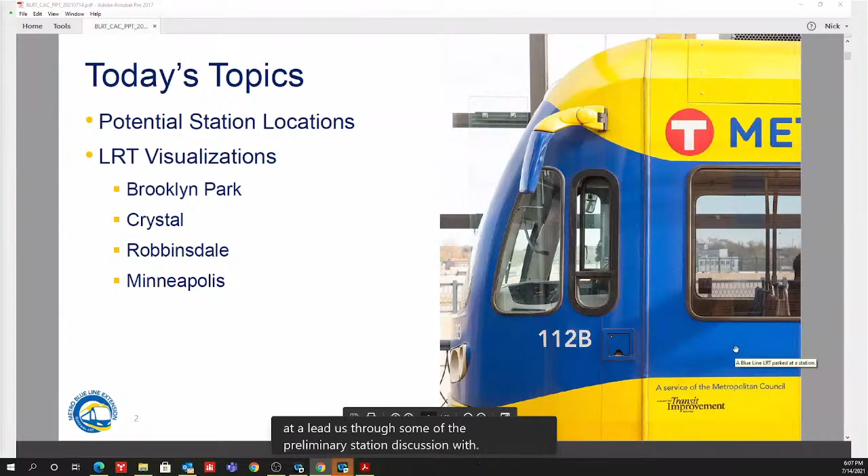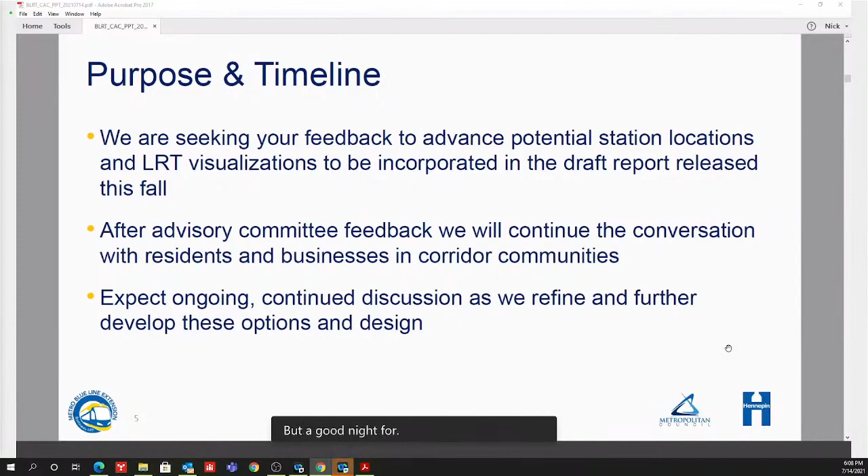Okay, we'll turn it over to Dan Soler to lead us through some of the preliminary station discussion. Well, thanks everybody, and happy to see folks tonight on a rainy Wednesday. Rainy here anyway, maybe stopping, but good night for a CAC meeting. So we presented similar information on stations and visualizations that you're going to see tonight at the Business Advisory Committee yesterday, and we'll share similar information with the CMC.

And this information on stations and possibilities for LRT is all work that we want to engage with in our open houses and public meetings through the remainder of the month of July. So what are we doing? We're looking for feedback so that we can continue to advance where stations might go, how they're configured, some feedback on the visualizations that we have, side running, center running, different configurations of LRT.

After these advisory committees, we're going to bring this out into the community at a number of public meetings. May see some of you folks there. Some are virtual, some are in person. We've got meetings in every city, and we want ongoing discussion for the next several months as we continue to look at what works, what makes sense, and how we continue to advance slowly and refine these design options.

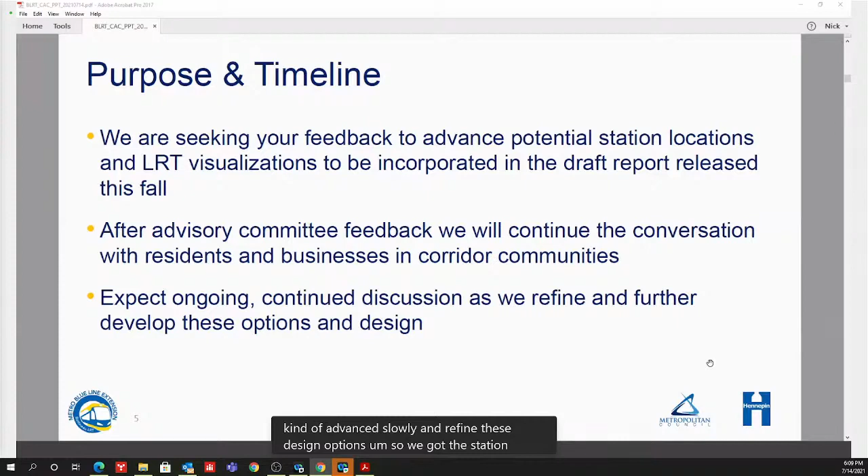So with regard to stations specifically, we're going to present tonight some potential station study areas that we have identified through our first cut of where we think we should study the possibility of stations on the various route options.

So how did we come up with these locations? Well, previously planned stations where we're close to or on the existing alignment were taken into account. A lot of work had been done around those areas. We had interactive maps and surveys, as you guys are all aware of, that people put a lot of input into about where they thought station locations would go. That fed into a lot of this work.

We looked at where key destinations were along the various routes. We looked at where transit connections would be, primarily with arterial BRT, but local bus lines as well. We looked at spacings, not getting stations too close, not getting stations too far apart, finding somewhere in that half to one mile spacing along here.

We looked at kind of a balance of the overall number of stations. So the total really hasn't been determined. There's no magic number we can have the same as we had on the last alignment, or we can have less, or we can have more. There's no real magic to it, other than, have we served all of the areas that we need to, and have we kept it a functioning LRT route that maximizes ridership, minimizes travel time, picks up and serves residents and businesses, but at the same time doesn't stop every block.

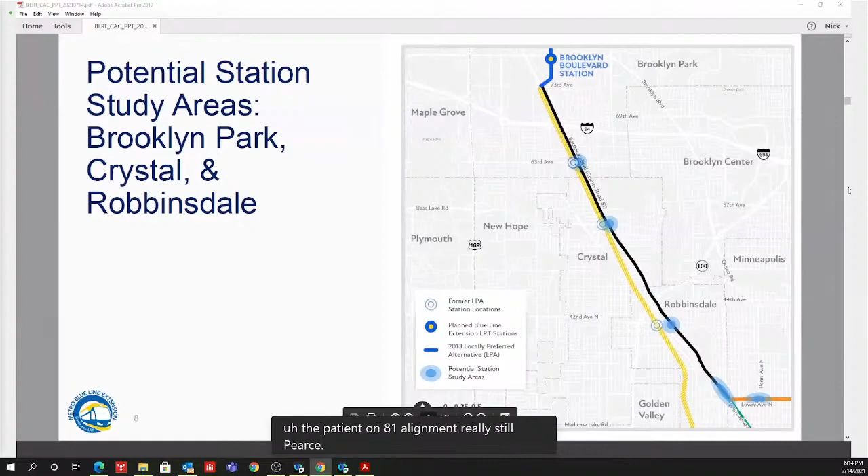Again, a lot of station area planning work about redevelopment opportunities has been done there. Really, the work done for a station on the railroad alignment and the station on the 81 alignment still pertains in those spots. Down in Crystal, very similarly with the station.

Dan, can I ask a question quick on that?

I know it's not designed yet, but I'm curious because it went from being between the rails and the parking structure, and now it's going to be on the other side of the rails. Is that going to go up and over where the BNSF is, or how does that work?

Good question, Jason. As you may remember, even on the railroad alignment it was on the east side of the BNSF tracks. So we proposed a skyway coming out of the second level of the parking deck, going over BNSF and down to the station, with the south end of the station served at grade with the traffic signal at 63rd.

On a preliminary basis, we'd propose to do the same thing. If it was in the center of 81, we'd serve the south end with the traffic signal, and we'd have a skyway, this time just longer. It would go over the BNSF tracks and over southbound 81, then connect to the station there.

What we don't know is whether we'd carry that design to the other side of 81, or whether to get to the east side of 81 you'd have to go to the south end of the station and cross at grade. We haven't really looked at that yet. There would likely be a vertical connection, since we still have to get over the railroad tracks—we can't cross those at grade. That would typically be the design there.

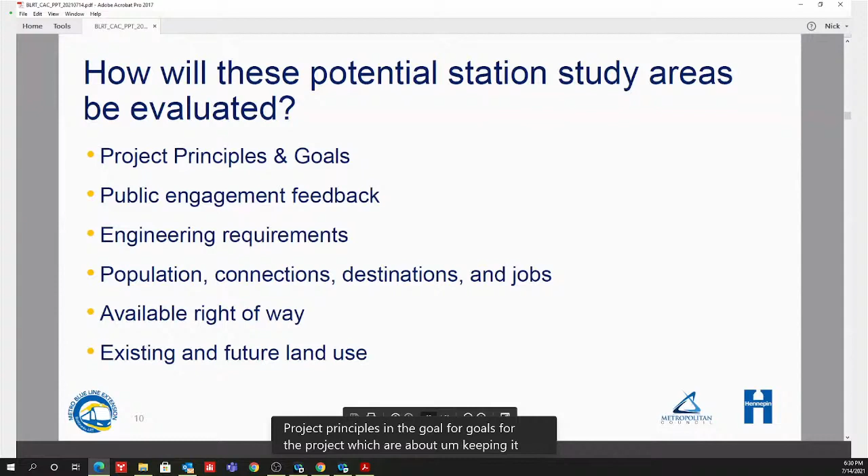So that's a little bit about how they'll be evaluated. So for discussion, both from folks tonight if they've got any, as well as ongoing, these are the things we're looking for info on. Are we missing any key destinations on these routes? Does it seem like it's in the right spot? Are we serving what's there today? And are we providing stations that allow for what might happen in the future?

Are some of these more important than others? What do we need to know? What community assets are most critical that we need to both serve potentially with a station, and then avoid significant impacts to because of a station? So that's a little bit of the discussion that we'll want to have at our public meetings over the next month to get feedback on these.

So that's a real high level presentation on where we're going. This is a very key part. It's also one of the funner parts, right? Because working on an LRT project is about where are we going to be able to stop and where are we going to be able to serve customers, and it starts to look like it's coming together when we do this. So happy to take any questions, any comments, any feedback from anybody.

Kathy has her hand up to begin with. Dan, Kathy Frazier. Hi, Kathy. Good evening. Hey, good evening.

I have a few questions here. The first one, I thought you mentioned that we are no longer going to have a park and ride on 73rd. Is that correct, in Brooklyn Park?

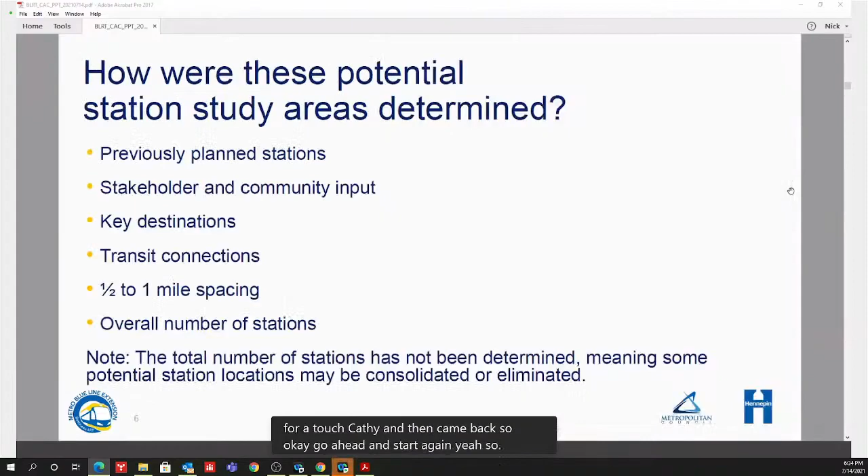Yeah, so currently it looks like there's no station on 73rd. So Brooklyn Boulevard will serve the 73rd Avenue businesses and people that live over there. And the distance from 73rd to Brooklyn Boulevard appears to be a little over a mile. So I'm just wondering what was considered there in terms of reaching some of those communities and businesses on the 73rd area.

Now you're challenging me to think about the past. I mean, I know we had always proposed a Brooklyn Boulevard station because of its connection to the retail there and the Starlite Transit Center and other spots. And then, of course, the next station is south at 63rd. So I don't know if we'd considered a station in the middle. I just don't necessarily remember that. It also seems like 73rd to Brooklyn Boulevard is not a mile, but I could very well be wrong.

Well, it depends on where in Brooklyn Boulevard that is. That's true. We do know that it was intended, Kathy, that the Brooklyn Boulevard station would serve that kind of entire residential area between West Broadway, Zane, Brooklyn Boulevard, and the south. And then, yes, in some cases, it is a little farther walk than maybe ideal. That's something to think about in the future, and there's also another issue in that area.

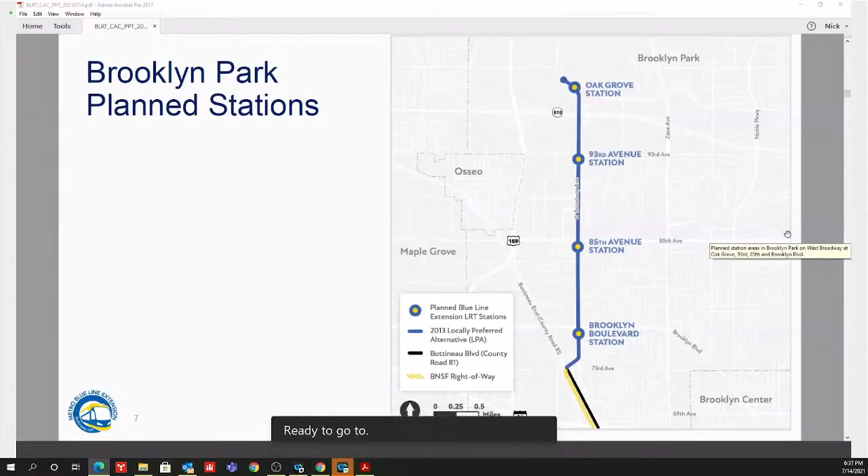Are we ready to go to Catherine? It's just a quick one, Dan. I've been looking for a traffic study, other than ridership. Is there a traffic study for the amount of traffic on both West Broadway and Lowry when we're talking automobile, and the potential impact of turning from Washington?

Okay, so yes, we've pulled together a traffic study that looks at volumes along West Broadway and Lowry, and what the conditions are today, and what the conditions would be if we built LRT. Right, Nick? This is all true, correct? Yeah, that's true, we've pulled the existing studies, yes.

Tell me, what was the last part, Catherine? Was it about the turn, is that what you were saying? Yeah, I mean, of course, you're looking at a turn either from Washington to West Broadway, or Washington to Lowry. So is there a study from other projects that talk about that interaction between a turning train and traffic? So in both of those scenarios, Catherine, we could never make the turn from Washington to Lowry or Washington to West Broadway at the intersection with traffic.

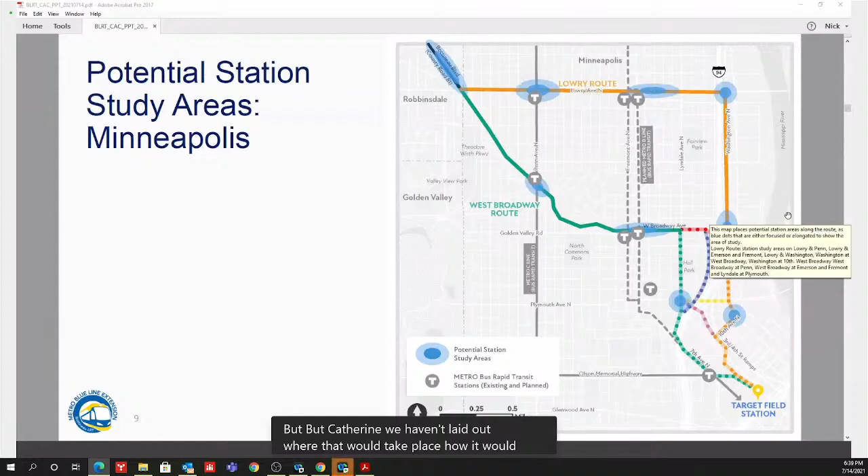That's similar to what would have happened at Van Wyck. So what we haven't done, though, Catherine, is laid out exactly where that would take place, how it would affect traffic, where we would make that movement. I mean, that would all be much more fine-tuned engineering design work. Yeah, thanks.

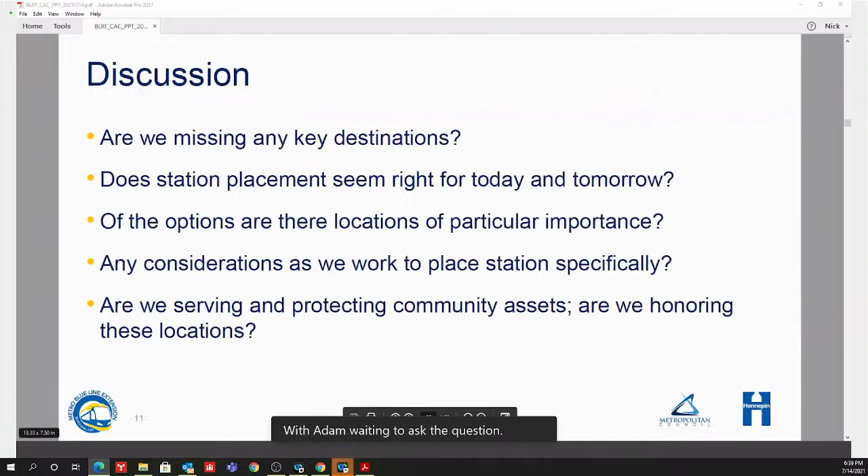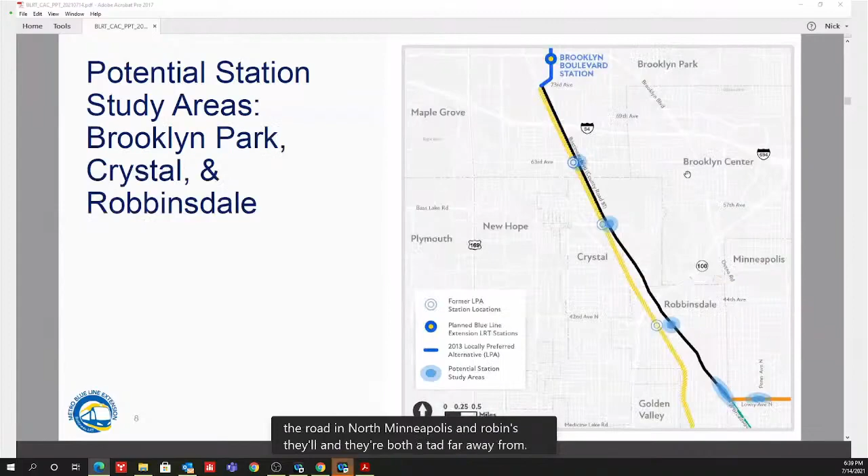With Adam waiting to ask a question. Thank you, thanks Dan for everything. Question I have is looking at the route, there's two main grocery stores that I see on the route in North Minneapolis and Robbinsdale, and they're both a tad far away from the proposed stops. Has there been any consideration about moving one of them a little closer to either the Cub on Lyndale or the Hy-Vee up by North Memorial?

Good question. So certainly with Robbinsdale, let's start with Robbinsdale. I mean, part of it has been, do we go a little further north with the North Memorial Station, so we would serve the hospital to the south and Hy-Vee and North Memorial's ambulatory clinics, or would we stay closer to the hospital? That's a consideration, that's a discussion, that's a balancing point there to get closer.

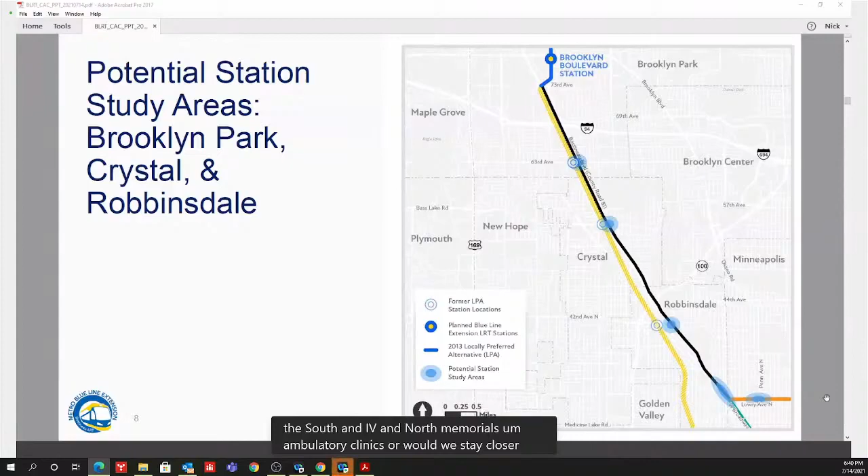Brent talked a little bit about his work. We also got a comment from the park board that they're putting a lot of improvements into North Commons Park. So should we be leaning more towards Emerson with that station, to be a little closer to North Commons Park? But that's part of it—we can't serve everything. So where do we use signage, pedestrian facilities, and where do we put the stations to get the maximum benefit out of it? The grocery stores are great examples, Adam, of key destinations.

I certainly have seen so many people on University Avenue from the Walmart, from the Cub that's there on University Avenue, using the train east and west. So grocery shopping is a big piece of it. Those are both key destinations in those cities.

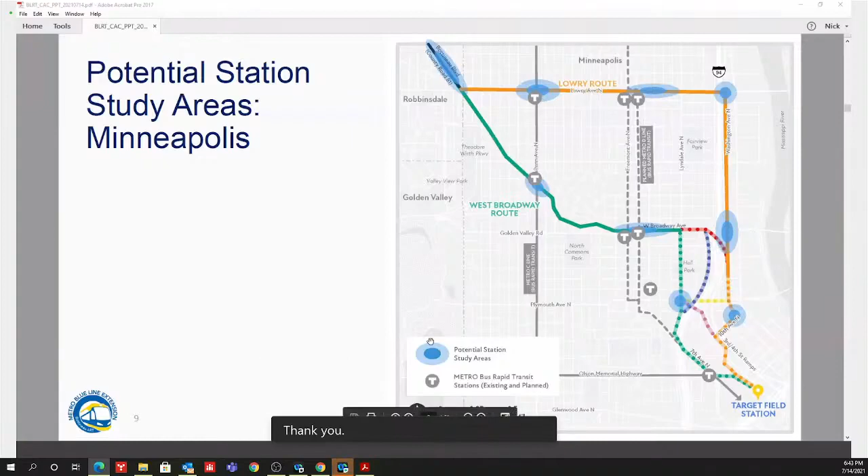I think we'll go ahead and move on. Oh, go ahead. Yeah, sorry, that was me, I'm looking for my hand raising and everything—it's just not working for me. Okay, this one works too, so that's good. I'm just going to blurt it out on this one.

Just a refresher—what is our proposed runtime from Target North, or that area, all the way down to Target Field? What are we projecting right now?

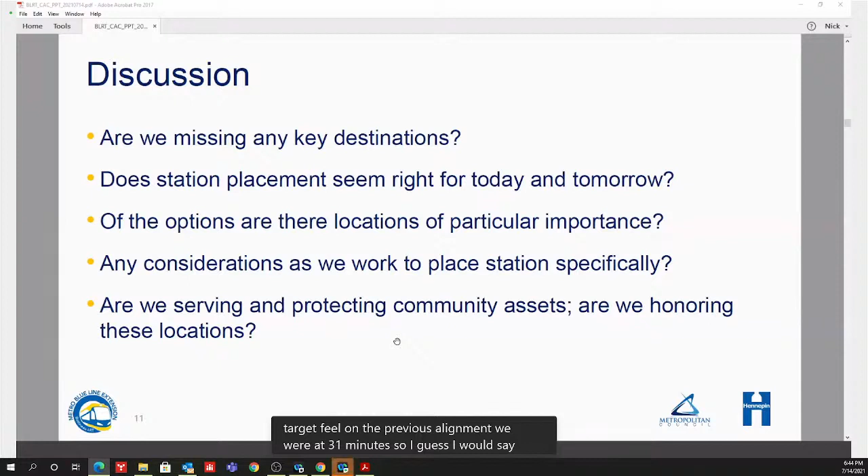I don't know what we're projecting per se as much as what we were at. We were at 31 minutes, right, Sophia? Yes, we're at 31 minutes from Target Field, Target North Campus, Oak Grove Parkway Station to Target Field on the previous alignment. So at a 31-minute runtime with the stations we had on the previous alignment, we were projecting ridership of about 26,500, 27,000 riders a day.

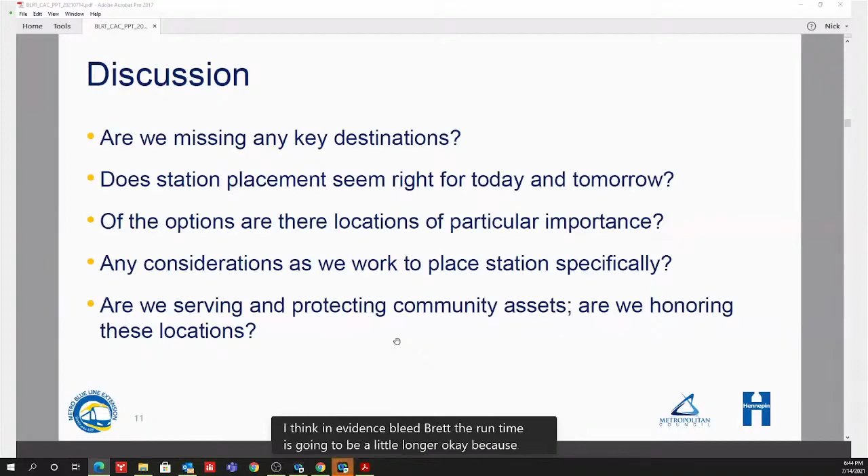So I think inevitably the run time's going to be a little longer than it was before, because we're in so much street running now that it's simply going to be. But we're also probably adding some stations and replacing some stations that I'd guess are going to have higher ridership than some on the previous alignment. So hopefully we find a balance, and maybe we're at a mid-30s, upper-30s run time, but we're still getting 28,000 riders a day. That would be great—we don't know that yet, but that's what we'd like to shoot for.

Got it. Follow-up question: the frequency on the trains themselves, every 10 minutes—are we looking at that as well? That's what the current Blue Line is, and we would propose right now to stay on the current Blue Line schedule of 10-minute headways for most of the day.

Excellent, thank you. I got my hand up. Yes, Catherine.

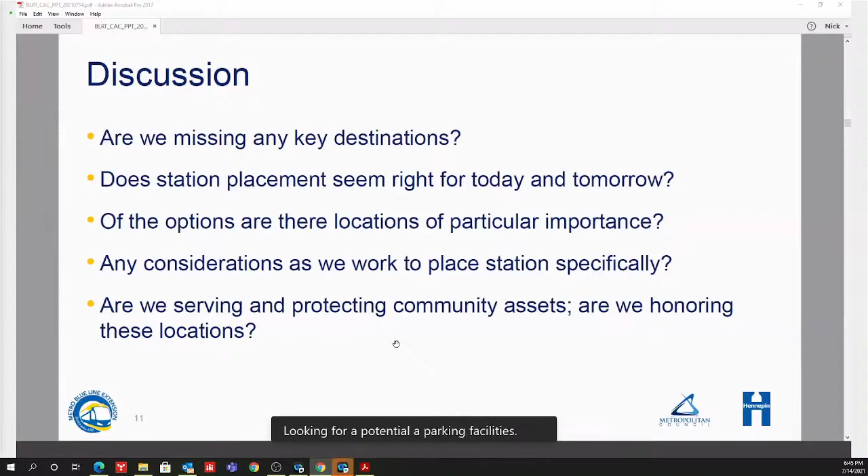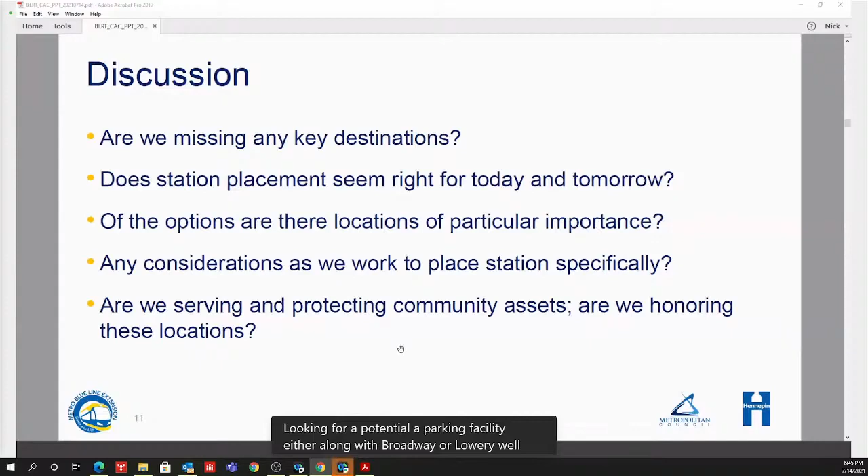I know there's been some discussion about looking for potential parking facility, either along West Broadway or Lowry. Will that selection have an impact on the station locations, or have you found potential areas where you might either build or utilize as a parking structure for the businesses along either one of those corridors?

We have not. That doesn't mean we haven't looked and said, oh, interesting—that one segment of the Cub parking lot near Lyndale, as I've looked at an aerial photo, never has any cars in it. There are some possibilities, but as it relates to station placement, that hasn't been as big a concern.

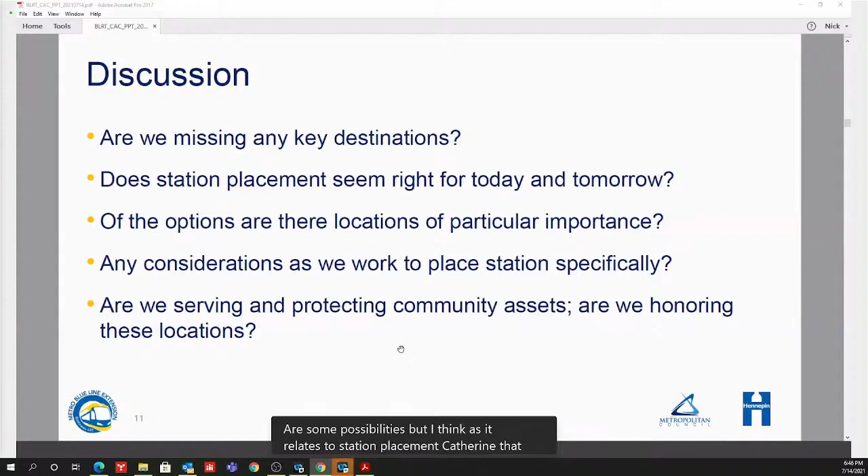I want to be very clear here: we're not talking about building park and ride. Any parking we build is for the use of businesses along the corridor because of the reduction in on-street parking availability. We do not want people to come as far as North Minneapolis and park in a park and ride intended for businesses to take the train to the airport. That's not the purpose of it.

We need to be diligent to get parking where it's needed for the businesses, and stations where it's needed for the riders—that's different from what I talked about with Robbinsdale. There, as we look at where we might put a station, where we might put park and ride spaces is different. We're trying to provide some park and ride spaces because we don't want people parking on street in business parking, and kind of vice versa in North.

We want to provide parking for businesses, with people walking up, or biking and busing too, and using the train. I'm totally with you on that—I'm not married to this cars-everywhere scenario. Yeah, so that's the intention.

So we've looked at some spots, but we need to work with the community about where it makes sense to put some parking and how it will best serve business. Just because we have available space way up north on West Broadway does no good for the businesses down by Emerson—it can't be a mile away. It's got to be close to where it's needed.

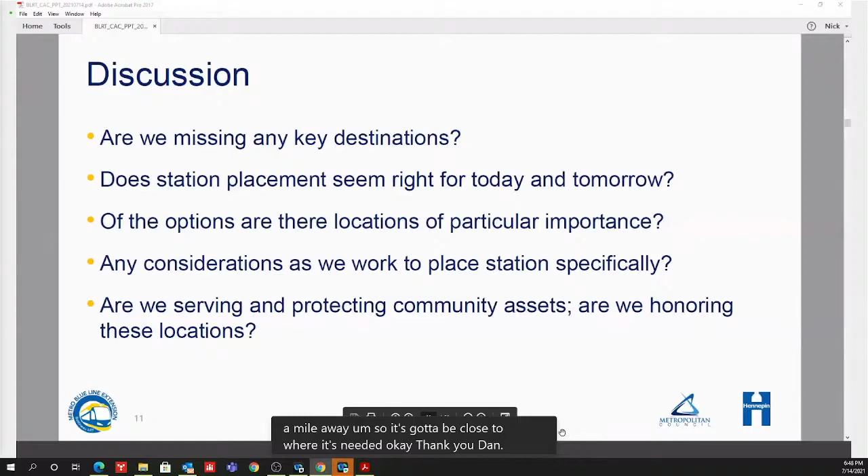So, I'll turn it over to Nick and we can talk about the visualizations—a lot of exciting stuff to see there as well.

Yeah, thanks everybody, good evening. As we roll these out, some of you may have seen a few of these visualizations. We're going to show representative ones at key spots along the corridor, just to get an idea of the context as we go through, starting up at Brooklyn Park and down through Crystal, Robbinsdale, and into Minneapolis.

So these visualizations are to start that conversation. A lot of folks are asking how this fits and how it works, so we're rolling these out here. You'll notice there's not a lot of dimensions on them right now.

We know we have a certain amount of space, but as we go out to the public and get feedback, and work with the city and county on these, we'll start appropriating the space that's out there for roadway, for sidewalk areas, and whatnot.

Also, on a lot of these visualizations you'll notice we're not showing a lot of landscaping and everything at this time. It's really to let everybody get an idea of the context, what the massing is within the available right of way that we're working with.

We're not showing intersections at this time—we've got to work with our project partners, the city and the county, on how intersections are going to operate, how we get left turns in, where we put bus stations in these areas. This is a lot of work we still have to do, but this is the initial rollout, so folks can get in their head how this actually works. So I'm going to start out on the north side here.

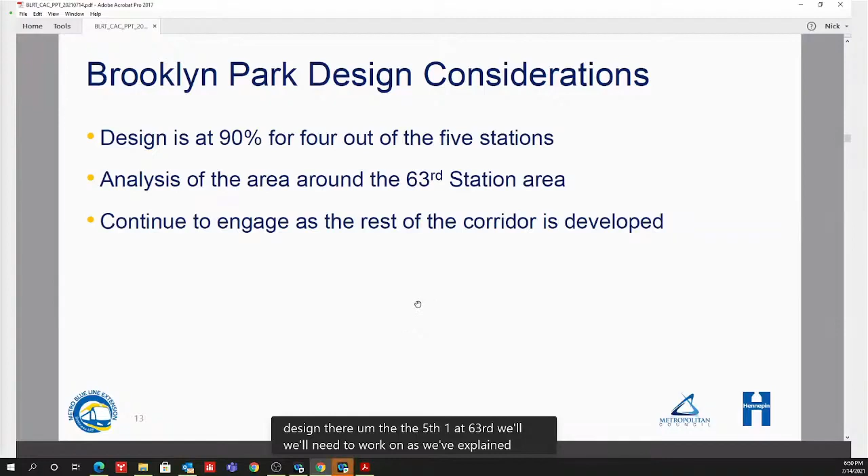Brooklyn Park is the easy one, as covered in the last portion of the presentation. We were at 90% there, with 90% design on 4 out of the 5 stations. The 4 stations on West Broadway are in design. The 5th one at 63rd we'll need to work on, as we've explained. We're going to analyze that area and continue to engage with the rest of the corridor as we develop it. We want to continue engaging with the community in Brooklyn Park, because it's been a year and a half to 2 years since our last meetings with folks there to explain where we're at with the project. It might not be fresh with them, or they may have forgotten, or maybe they just haven't known about it and are newly engaging.

The exhibit I have here comes from our 90% plans for the 85th Avenue Station area. As we get farther into design, we start knowing how the station platform will fit. In this case, we're center running down West Broadway. We start knowing how to incorporate pedestrian and bike facilities on either side, and we look at road design, refining intersection design, focusing on safety and pedestrian crossings, and how we connect to the surrounding areas.

In this example we have a center station. We have access to it - this is fairly typical for a center station at an intersection. We use the intersection as access on one side, and on the other side we'll always have two means of access to a station. On the back side, there's a pedestrian access that goes to and through the station across the road. At the crossing, there will be signals where pedestrians can push a button to activate flashing stop signs for cars, which stop to let pedestrians across.

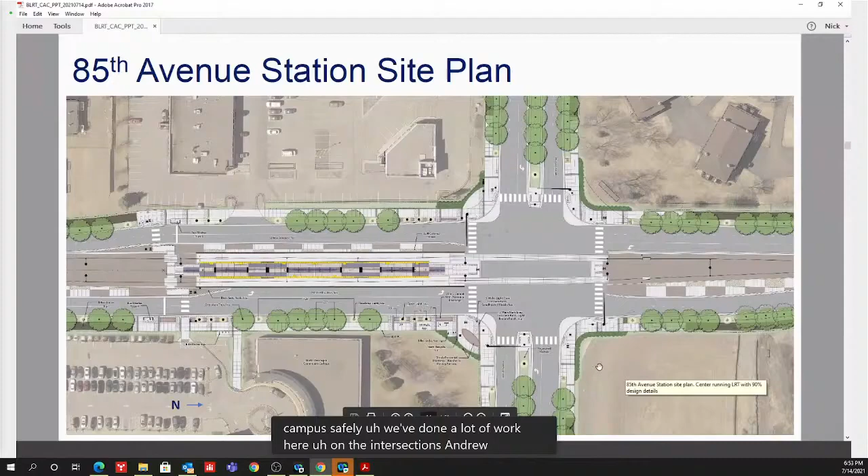We have really good renderings of how the center stations would work. In the previous design, all our station platforms had the same footprint - they were all center running stations - which is convenient for riders, since they know there will be card readers as they get on, so they can tap their Go-To cards, or ticket vending machines up front to buy tickets. These are all in the same spots, as well as the signage letting folks know which track they're at. We'll also have video signs to announce train times and which side of the platform to be on depending on direction. As we worked on this project on West Broadway, we narrowed down the traffic lanes so everything could work within that right of way, which helped provide a safer pedestrian experience by narrowing the conflict area with vehicles and reducing the time a pedestrian has to be out there.

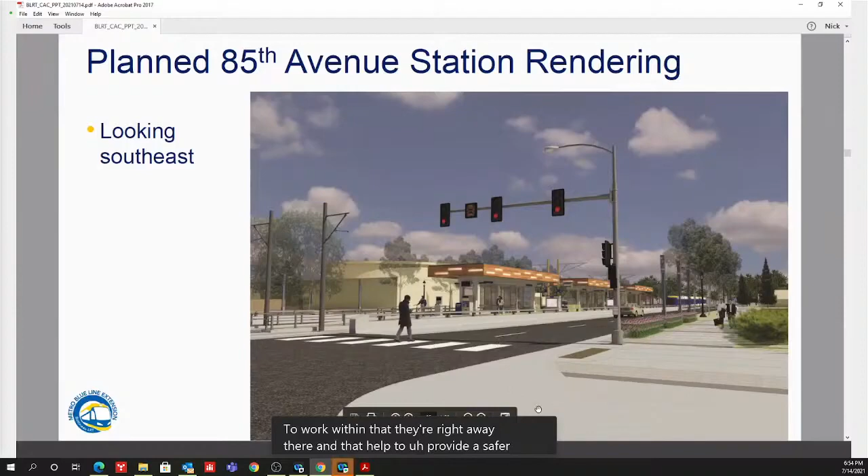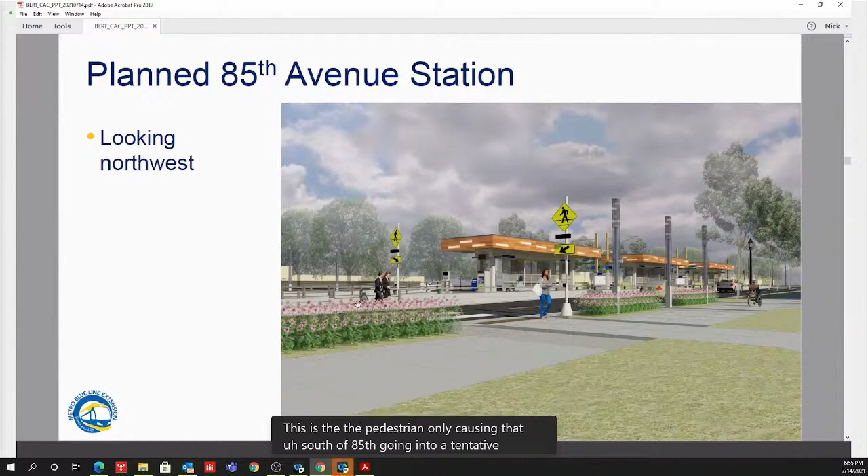Same station, just looking at a different angle. This is at the south end, where there's a pedestrian-only crossing south of 85th going into North Hennepin Community College. It works with pedestrian push buttons that bring up a sign with flashers to let vehicles know that pedestrians are crossing.

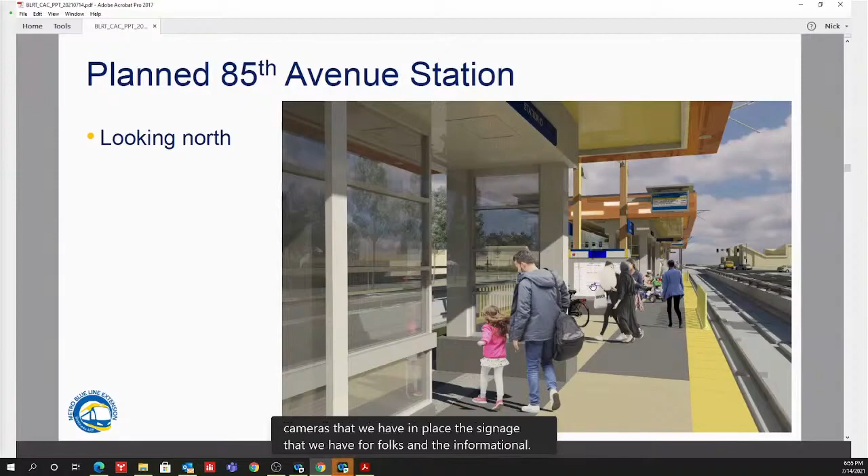And this is a good view of what the station platform will look like, with the shelter, little shelter areas, heaters, lighting, cameras that we have in place, the signage that we have for folks, and the informational signs on train schedules and whatnot.

So that was Brooklyn Park. Again, it's just a recap of work that we've done, and the 90% plans we're at. So as we go down into Crystal, are there any questions on Brooklyn Park before I go forward?

Okay, with that, I'll jump down into Crystal. As we go into the Crystal design considerations, we need to confirm that center running at grade on County Road 81 works, working with our project partners and the community on how it lays out and where the stations go in.

Also, in this area, County Road 81 is a 6-lane design with the center running light rail going down it. We know that we'll have to take a lane from there, so it'll become a 4-lane road design. So we're evaluating, looking at traffic studies, traffic and capacity analysis, and how the intersections will operate through there, and that they still function at acceptable levels.

And as we looked at with Bass Lake Road, we'll look at that design and development and how a station fits in there, moving it out from where it was in the rail corridor, out into 81 in this location.

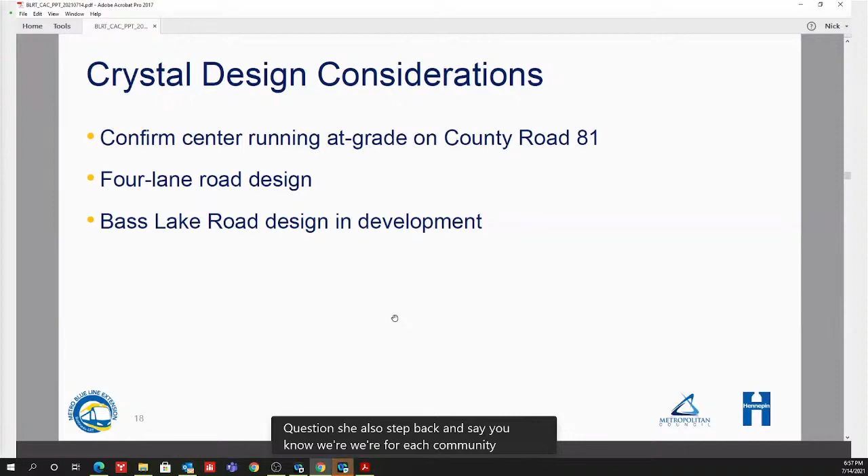I should also step back and say, for each community we're putting together quite a few visualizations you're going to see here on representative areas along the corridor. I'm just showing you a few of them in each community right now, for interest of time, because each community will have a pretty good library of them, and representative spots along the alignment and routes.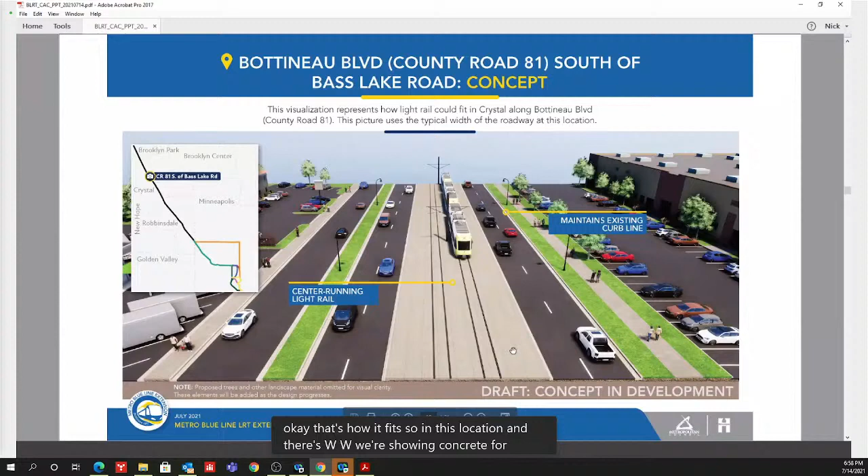And now as I flip down, this is how the center running light rail fits within that corridor. So this gives folks a better visualization of how it fits. In this location, we're showing concrete for that guideway, but as we have left turns, there's a good amount of pavement out here to account for left turns at the intersections. How we program that area outside of what we need for the guideway is still to be determined - we'll look at that as we get farther in design, but this is really for massing again.

What you can see, and I'm going to flip back and forth here, is that with this design, by running down the center using 2 lanes, one on each side, we're able to stick within or maintain that existing outside curb line. So we're staying within the footprint of County Road 81. I'll flip back and forth so you can see how that curb line stays in place, and doesn't really impact, in this view, some of the properties on the outside staying within the right of way.

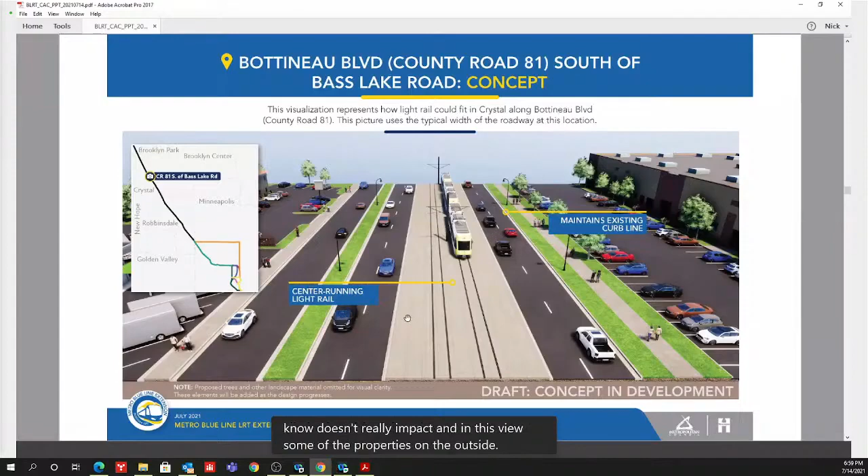I'm going to jump down here a little bit farther south on County Road 81 in Crystal. This is at 48th Avenue. Again, 6-lane roadway through here, center median in this location. This is a little bit more residential in character with residential on both sides of the area, and there's a frontage road here on the east side.

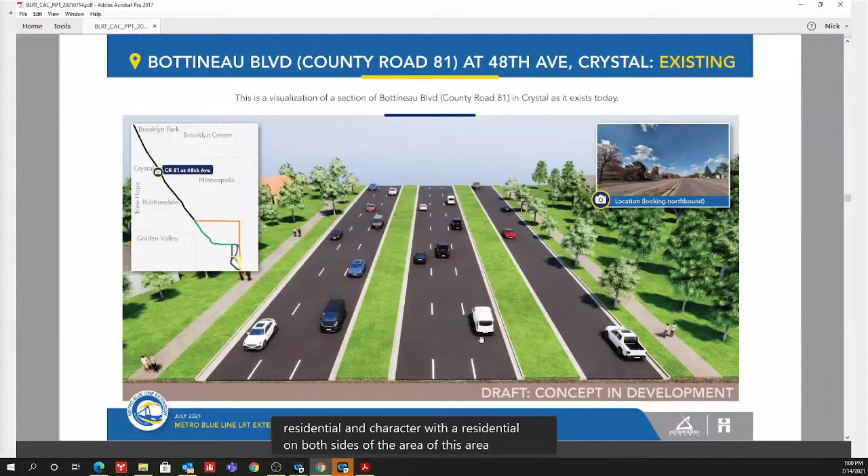And as I go down, this is how the center running would fit in that corridor, with 2 lanes in each direction, and maintaining those frontage roads and maintaining pedestrian access ways, pedestrian trails and bike trails on both sides.

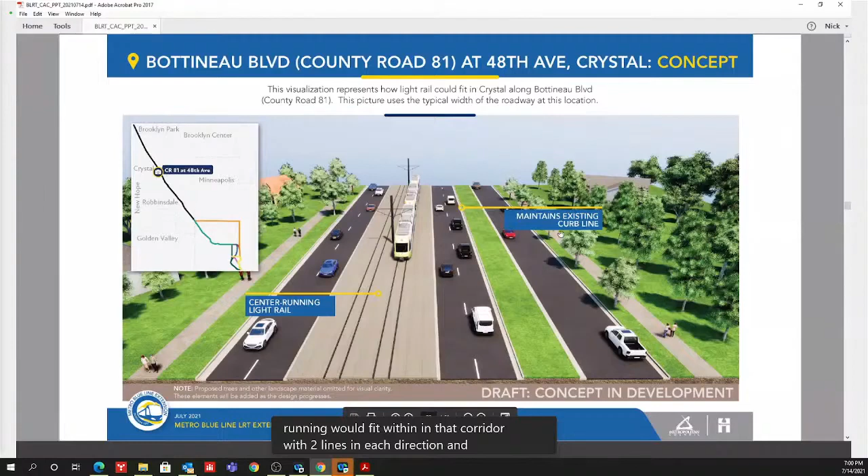Any questions on Crystal as we go through?

Next we're going down to Robbinsdale and some of the same considerations. We're going to confirm center running at grade on County Road 81 in Robbinsdale.

In Robbinsdale, there's quite a few intersections, since we're going to be in the downtown area, that we're looking to maintain, and we believe we can maintain those intersections and the full movements on those intersections.

We want to really focus on pedestrian safety, the crossings, and the pedestrian environment, as we're getting feedback from our advisory committees and from the community. That's one of the key focuses here: we really need to focus on pedestrian safety in downtown, with the highway there, and then you're going to put a train there. We want to make sure that it's safe and accessible and doesn't divide the community.

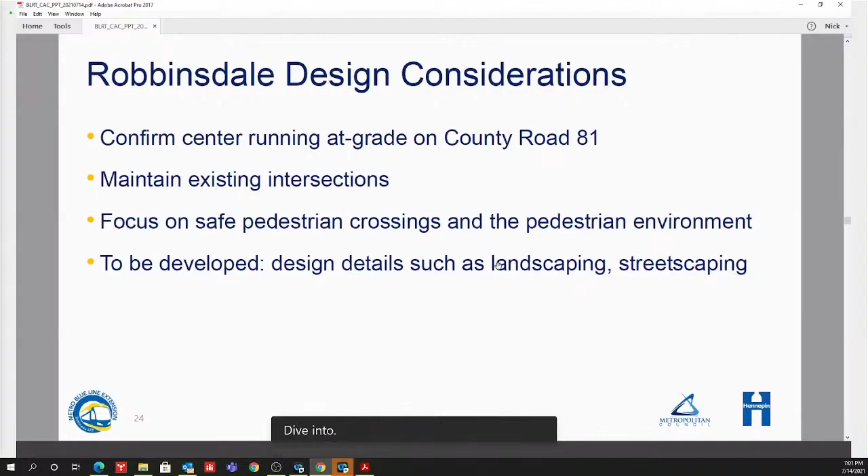What we're going to work on as we put this together is develop those opportunities to create safe crossings and do the best we can to help pull things together and have it not be a divider. So again, to be developed as we move through will be the details, such as the landscaping out there right now - how do we replace that landscaping, how do we work with the streetscaping as we get going forward. Those are things we'll really dive into as we get into design. But again, this is for the massing.

This is County Road 81. We're looking north, just above 40th Avenue. So 41st is up here in the distance, and this is town center up here.

You'll see that we have a pretty good sized retaining wall existing today with parking above it, and there's actually underground parking behind this wall in locations. We have a sidewalk or trails on both sides, a median in here. We have turn lanes that are left turning onto 41st, and also right turns into the Robbins Center Shopping Center, both the lower and upper centers. So this is what it looks like today.

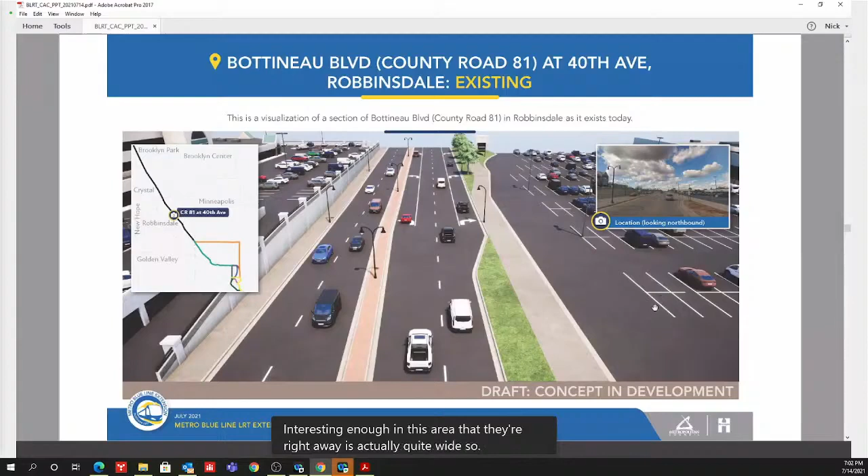You can see with the center running here that it does expand out. Now interesting enough, in this area the right of way is actually quite wide. Go back to the existing - the actual road right of way, or the public right of way, goes up almost to the striping on these parking stalls in this location. So as we're looking at it, we're able to maintain pedestrian access out here, and we'll continue to work on how we provide the best environment we can on both sides.

This is probably a little bit easier to see - we've got some extra pavement out here with these turn lane shadows, as we call them, and those are opportunities we can take a look at in the design as we get farther into it. Is that a place we can do hardscaping with different pavers or different kinds of finishes, or if the city is interested in maintaining, is this where landscaping goes into these locations?

We do know that with the grades, and depending on where stations go, we would likely have to reconstruct the wall that's along here, but it stays within its existing place. We maintain the 2 lanes of traffic in each direction, we maintain the turning movements through here. We do move a little farther towards these businesses. We stay within the right of way with the improvements, but some parking is lost in here, and we'll work with these property owners on mitigation for those losses and how to either incorporate something or work with them on the best solution.

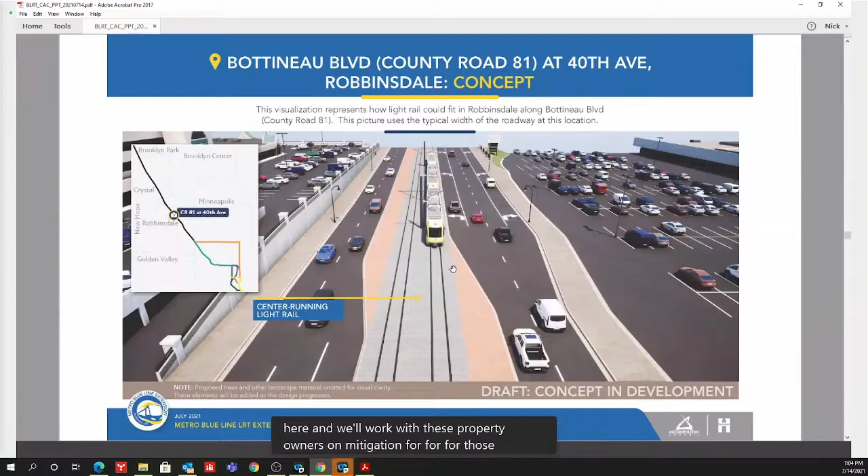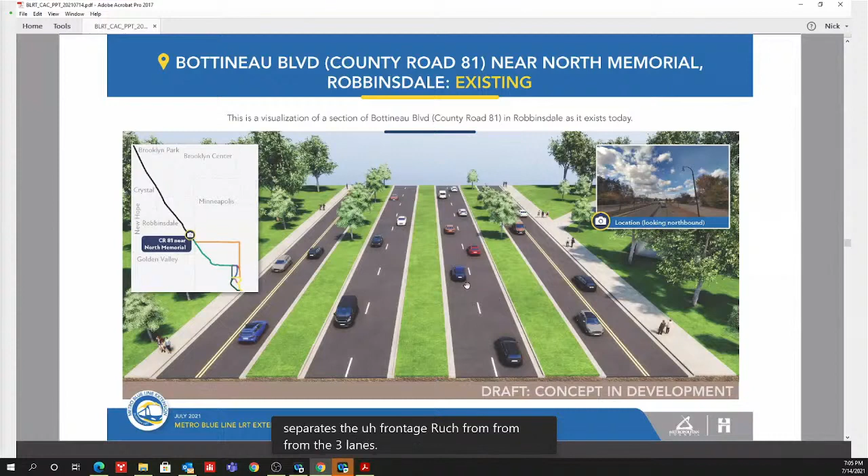As we flip forward here again, we stay pretty close to those existing curb lines, using up that center median, maybe taking a little bit of the boulevards on either side, but we're able to maintain in this location the frontage roads on both sides, and maintain pedestrian ways through this area.

So that's Robbinsdale in this area. Any questions here, concerns, comments?

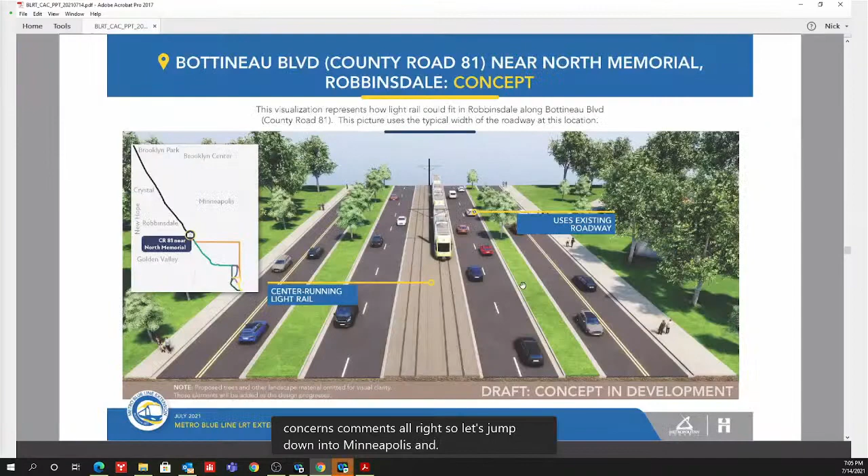All right, so let's jump down into Minneapolis, and this did this to me before. Sophia, you might need to take over here because it's stalled out on me, it looks like. I'm going to stop sharing. Hey Nick, I will see what slide you were on. Slide Robbinsdale, slide 33. Apologize for it, for some reason it seems to time out on me when we get to slide 33. Solid plan, Nick.

It's a good time for discussion on these visualizations, I guess. Are folks seeing these as helpful? Can you see how things lay out? I know there's been a lot of concerns of folks saying I just don't see how it can fit, and hopefully this helps to visualize that a little bit better.

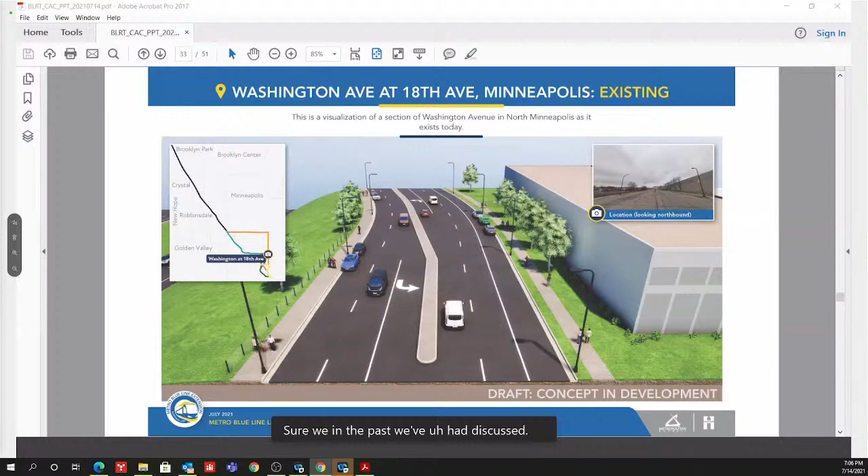Well Nick, while we're waiting, can I ask you some generic questions? In the past we've had discussions about silent trains and some of the issues that were on University. You mentioned that you were going to take special safety precautions in Robbinsdale because the folks would be so close to the train. The train has no whistle, is that still correct?

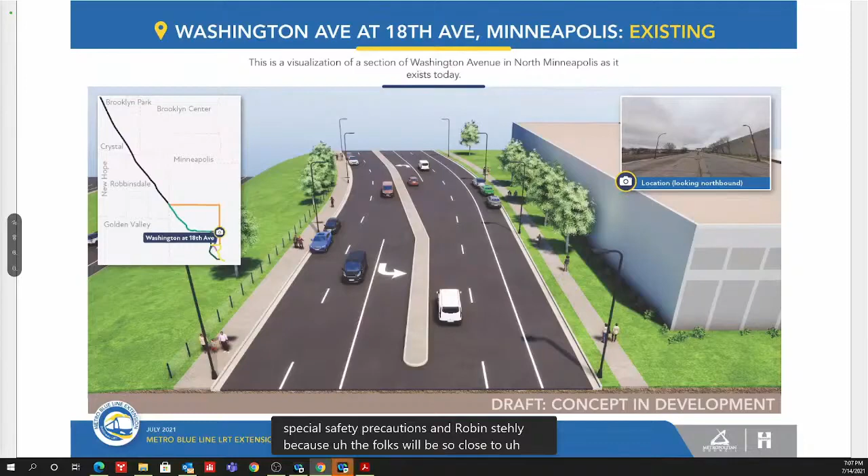Well, I guess typically when we're running in that condition, we wouldn't be using a whistle. As they come into a station, they'll use a bell coming into the station, so to let folks know on the platform it's coming in and warn them, because it is quiet. We'll take a look at how we can best get pedestrians to and by the station and get them squared up with the train so they're looking that direction and hopefully not just looking down at a phone or something like that.

Well, they're going to be looking at the phone, but as I mentioned before, by the time we get the whistle, I can already see the train. I need to hear the whistle or that it's coming before it gets there.

Yeah, and also, when we had Olson Memorial in the plan, we had a lot of cultural input along the rail. Communities inputted their design and requests and things that better identify the neighborhood through which the train was flowing. Is that going to be part of it? Are we using any of that artwork and those renderings, or how's that going to work?

Yeah, so again, let's get back to pedestrian safety. We'll make it so we're encouraging as best we can to keep people crossing at the appropriate location. So we'll want to make sure that along the whole corridor we're taking into account pedestrian crossings at intersections where it's signalized, but also we need to provide appropriate crossings so people aren't trying to jump chains and bollards and fences and running across the track. They're crossing at the appropriate place.

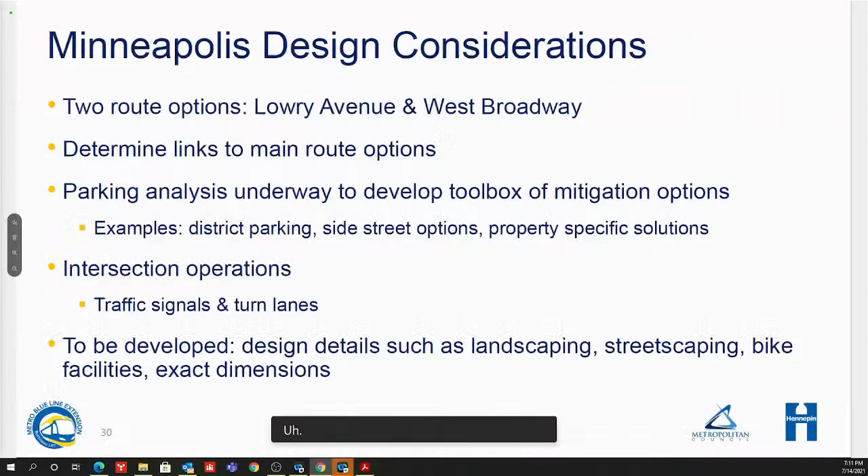All right, thank you, Nick. Get back to your slide that you were avoiding. I'm not avoiding it. I know, that's why Sophia had it ready to go. What was the next slide, Sophia? Is this our next one? No, the up. Keep going. Okay, no, down one. Oh sorry, down to the Minneapolis discussion there. Yep, right there. Too far, right there, can we stop? Thanks. It's lagging, but it's showing.

Yeah, we've also got to resize the video. Okay, got it. Okay, so in Minneapolis, what are the things that we need to look at?

Well, we have at least the 2 route options that we've rolled out. So the Lowry Washington options are what we need to evaluate, and West Broadway options, and then also as we get into links, how those come in there. So we want to take a look at some of these concepts that are respective along those 2 routes, and how things will fit in here.

With that, we'll need to spend a lot of the time as we look at these. In this case, there's pedestrian and bikeways out here. Lowry has a bikeway along it. As we roll through, we're going to have to figure out how do we accommodate for those bikes and that bike route. Can we keep it in the road? Do we need to mitigate it and maybe move it a block off or something like that? We understand that we need to take care of that. Landscaping, hardscaping is another thing that'll come down the road here as we're looking at it, and we determine how these lay out.

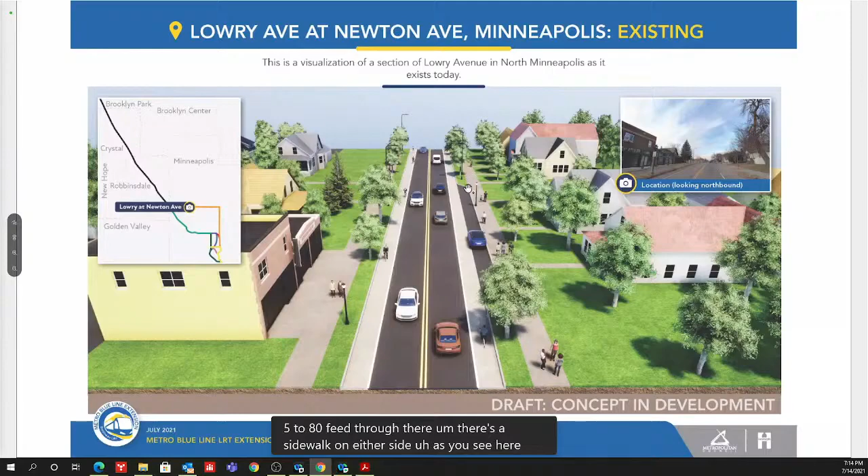Next slide there - so this would be center running, and you can see that this really widens out that footprint, more of the roadway and the sidewalks in this location. It pushes it out closer to the properties there. We'd still stay within right of way as much as humanly possible. So this photo shows the center running guideway, and our guideway, we've said before, is a 28 foot minimum guideway. 28 to 30 foot is where we need to be, depending on if we need signs or signals or something in there. But that guideway is very - not a lot of room to move there. So what we have left with room on the outside is what we need to allocate for traffic and pedestrians and bikes in that location, and then the other amenities that would go into boulevards.

So this location shows a little bit different color as we get out to the sidewalks. We have sidewalk on either side. We have a colored band for a boulevard that can be used for different amenities, whether if it's wider and can be planted, or if it's narrower, or do we use it similar to what we did on University for stormwater runoff and treatment, and would trees fit in this location? So those are all things that we'll need to look at as we get into design.

What you'll notice on this photo is we have 1 lane of traffic in each direction, similar to what it was. We do mark it here because there was a bike lane before - we have those bike sharrows, as they're called, shared lane sharrows in here. We need to determine, as we go forward, if this is how we maintain, how do we mitigate for bikes along here? Do we maintain bikes on here? How much room do we need for it? What is the condition that we feel is the best to accommodate that?

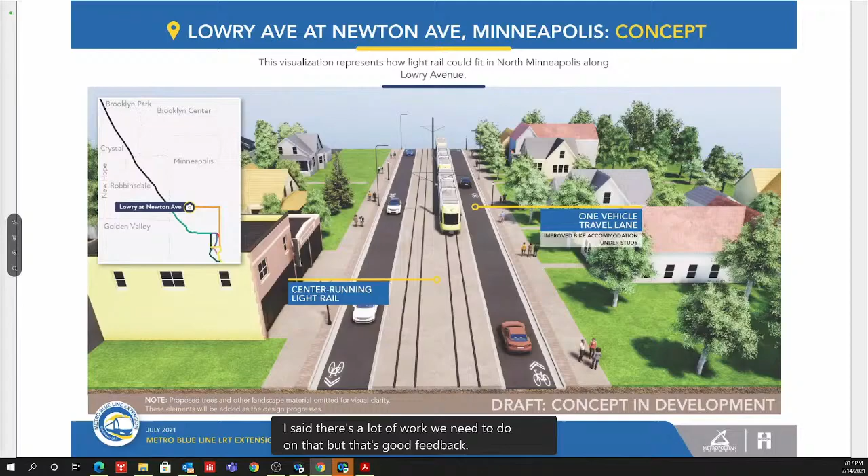No one would ever ride down that street that way. I don't know if Adam and others agree. Not even worth the paint. That would be so congested, you'd have so many issues. That's asking for trouble. I can't say I disagree with you. I appreciate the comment, and like I said, there's a lot of work we need to do on that, but that's good feedback. All right, let's jump to the next slide, please, Sophia.

So this is a view or concept of Washington Avenue, about halfway down by 18th. The existing view shows 2 lanes of traffic in each direction. We have turn lanes in there, and there's parking on both sides of the road in this condition. Underneath that key map is where I-94 is—you can see little parts of it down there, and the grade or slope down into the I-94 corridor.

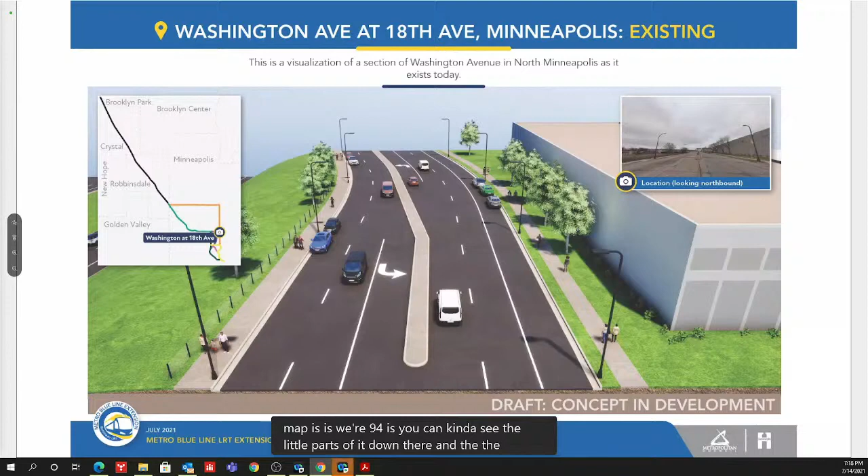Trails on either side here, or sidewalk at least on either side of this. So next view—this would be a center running LRT down Washington. We're able to maintain a lane of traffic in each direction. We're showing a left turn lane here. We can continue with the pedestrian way, maybe a little more enhanced on pedestrians, and we're showing the possibility of getting a parking lane on that outside or southbound lane.

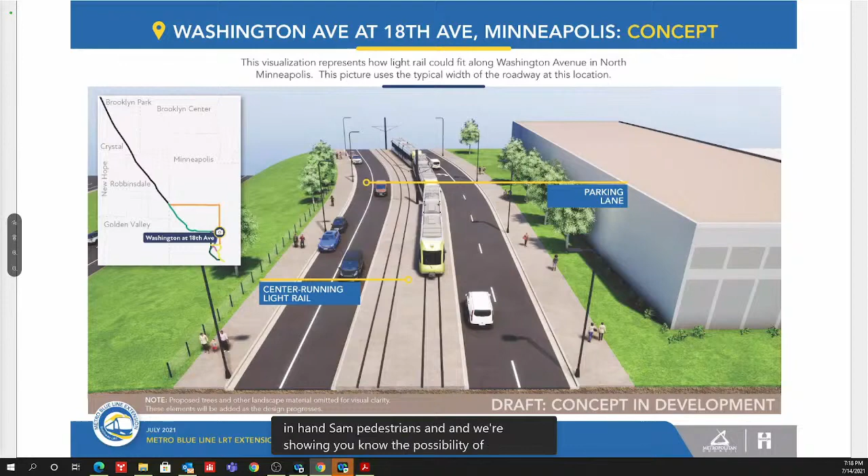So next is moving over to West Broadway. This is by Queen Avenue, the existing shot—a 5-lane section, 2 through lanes each direction with a center turn lane. This is a little more residential, with single family on the southwest side, and on the northeast side, apartment buildings or a little higher density residential. Sidewalks on both sides here.

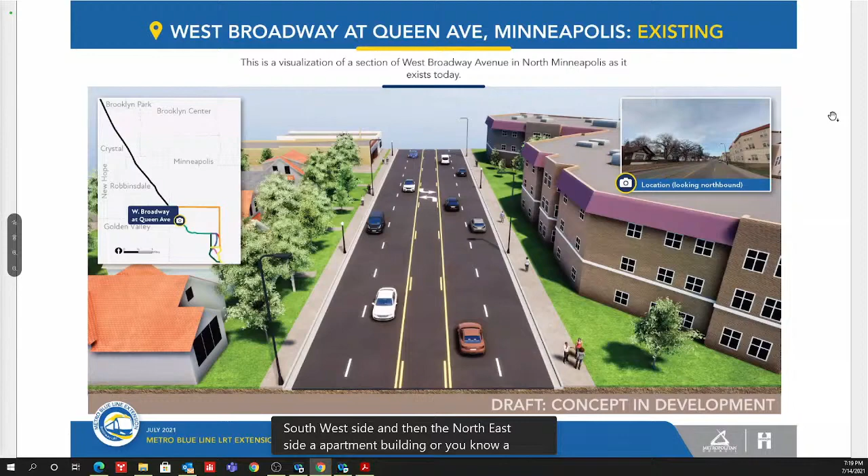So can we go to the light rail view? This is where it gets pretty significant. We go from a 5-lane section to 1 lane of traffic in each direction, able to maintain pedestrian ways throughout here, and fit within this corridor.

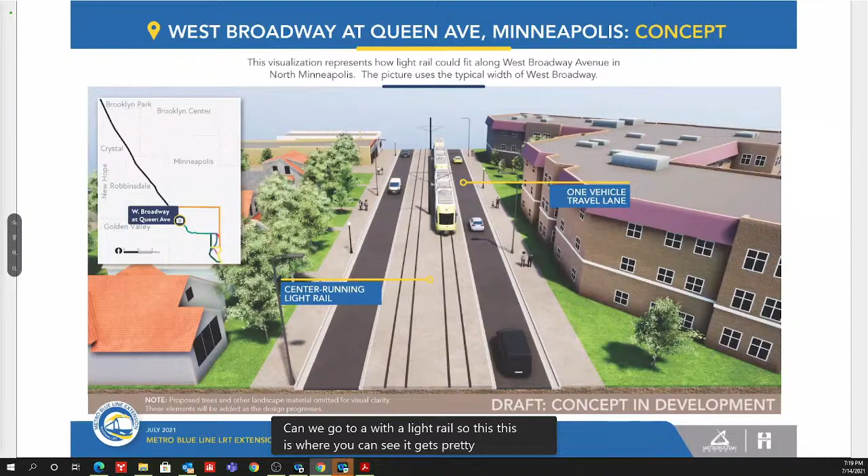Next slide—this is West Broadway and Emerson. This photo is taken right at the intersection of Emerson, looking north, showing how it fits today. It's a little more commercial in this area, with 2-story buildings, parking on both sides, sidewalk on both sides, and 2 lanes of traffic through here.

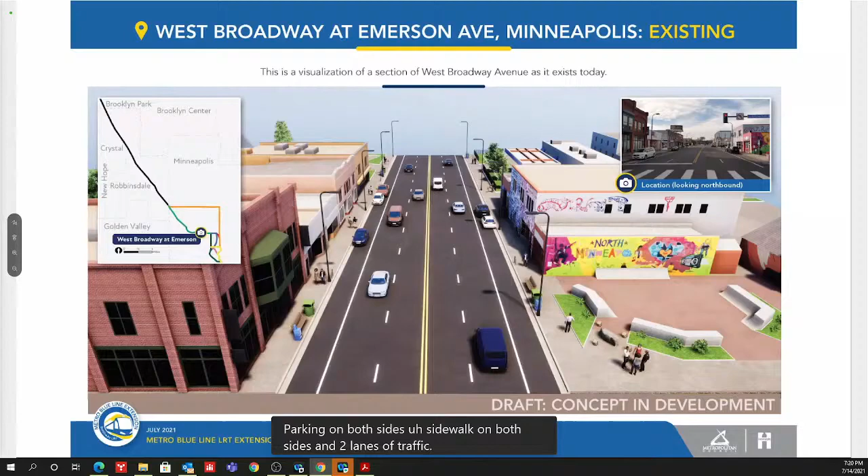So let's switch to how light rail fits through there—1 lane of traffic in each direction, and we get sidewalks on both sides. There's a lot of work we'll need to do with the county and the city on design, to allocate that roadway and keep adequate room for vehicles, while also paying attention to pedestrian movements through here. As you can see, there's not the opportunity for parking here—there just isn't that room. So this is some of the discussion we're having as we start analyzing what parking is out there and what our options are for mitigating that loss. What's in our toolbox to make up for the loss of parking through here, and how do we continue to support the businesses in that community?

Can I ask a question, Nick? I know I'm jumping ahead to the elevated and side-running stuff, but I'm curious—if you go back one slide, does that at-grade center running option allow you to widen the sidewalks on Broadway? Because currently you can't walk too wide on it without almost being in traffic. Yes, I think the answer to that is yes—it is a narrower sidewalk on both sides right now.

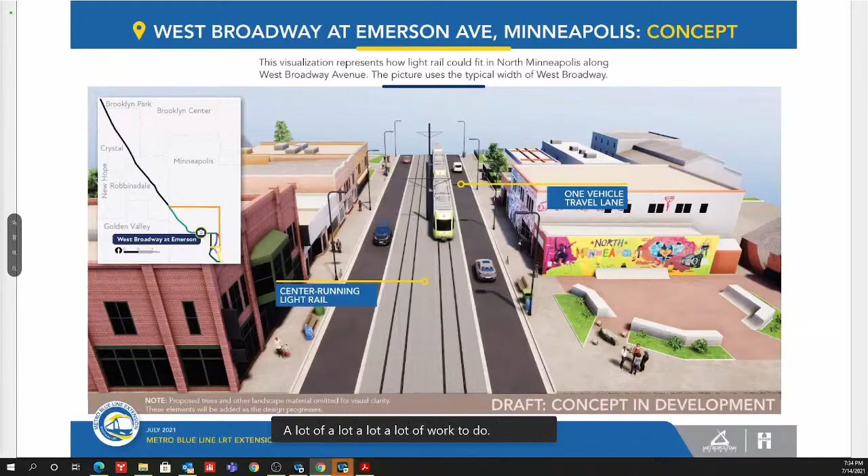Hopefully you guys can still see the screen. Are we on the page? I've lost the screen. Side running, elevated intro slide. So I'm going to try to walk through this a little bit with the elevated section. Is that slide up, Sophia? Yep, it is now, Nick.

This is just an example of how elevated would fit along the corridor. We use this section by Emerson as a representative example. Elevated would be similar anywhere else along the corridor. We didn't put this into each one of our concept views at all. It's just more to see what that is, because we're getting a lot of comments from folks asking, have you considered elevating it here? Our first question back is, why would we elevate?

Usually you elevate for a physical reason, to get up and over something. And I think some of the thought is, if we're elevating a structure, it's to get back more room on the roadway. With this slide, you can kind of see by the time you get the abutments in the middle and the structure up there, and you still accommodate for turn lanes, and make sure you've got the clearance to protect, you can't have traffic running right up against those abutments. You need clearance zones, so you really don't get back much more road space with the elevated. It ends up being a very large structure that overshadows things.

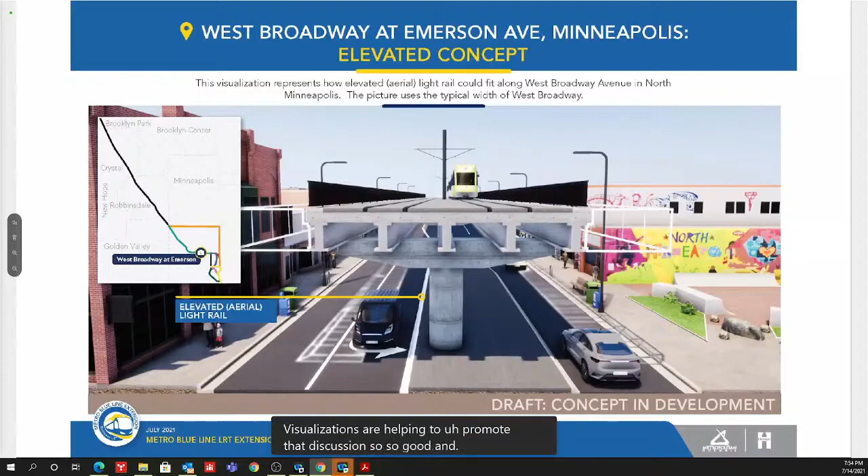Nick, just one last recommendation, because I know these things are going in front of community members and all those types of things. I think having one set of renderings around one station where you've got some things around the surrounding community, a street north, a street south, this is how bikes might work, this is how the pedestrian stuff might work, I think that would be helpful as you're taking this out to smaller groups.

You can't do this all the way along the line, but just reminding folks again and again that there's a bigger path here that needs to be figured out, and we're aware of it, we're not going to forget about it. We've got renderings around it, this will be a part of that program. I think that would be beneficial to your sales process going forward.

Yeah, what he's saying, roll plots to kind of get into the weeds of those details. That's a good point, and that's what we do - we use those roll plots where we have a broader map for those discussions.

So thank you, let's talk a little bit about the others - I think Catherine might have had one more thing. Nick is an engineer, and the things he does are engineer-ish, if that's a word. So to the gentleman's point, if you make it a little more relevant to the smaller groups, you're definitely going to have a bigger win. The information is great, but just gearing it more toward your audience. Well, thank you - I do a lot of things that are engineer-ish every day, Catherine. That's good.

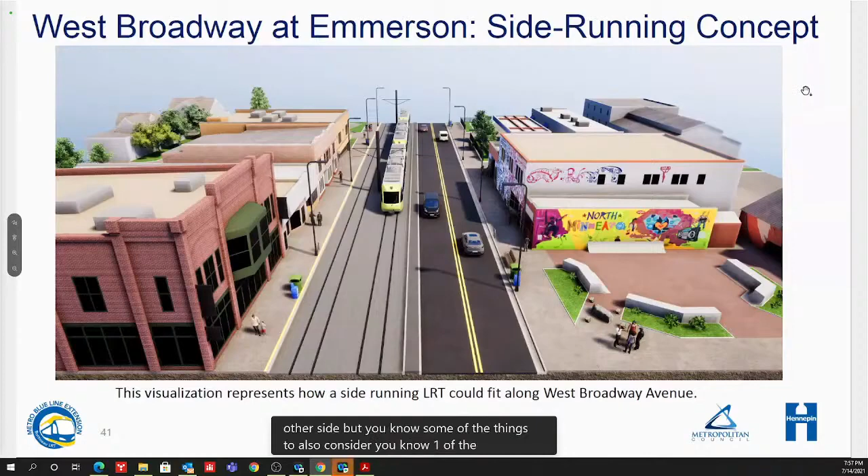One of the things we want to bring up here as we look at side running - you think maybe it consolidates things a little bit, keeps traffic on one side, keeps the light rail on the other side. But some things to also consider, and one of the reasons we're not recommending it, but it's out there for consideration, is that side running does have a lot more impacts.

Where we have issues with left turns, those are compounded with right turns across that track as well. Anytime we have a crossing on the track, we need signalization there to control the traffic going across it. So what happens with side running is it's more impactful to the side it's on, as far as crossing that track with traffic - we need to make sure it's signalized. So if there are driveways or alleyways or unsignalized streets, those would potentially be shut off or closed down in those locations.

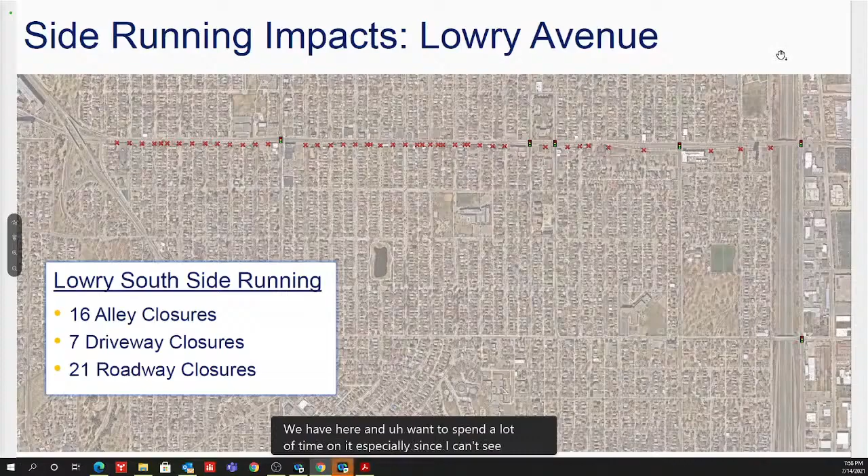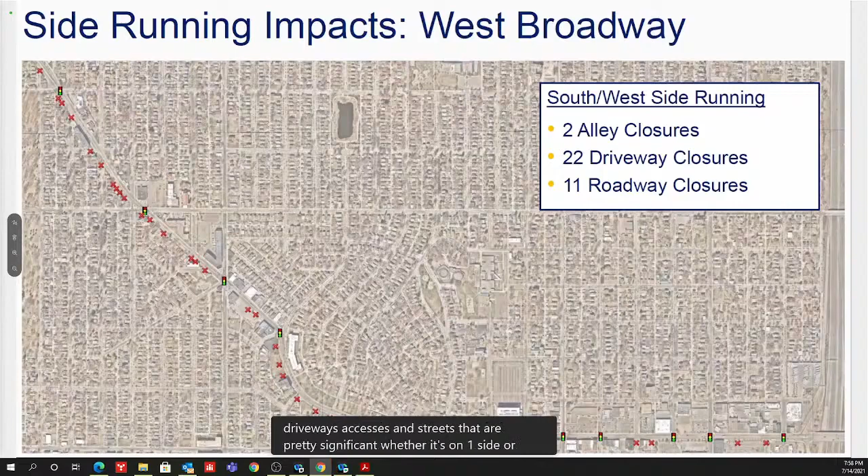So it really has a heavy impact on how traffic flows through the areas, especially in this downtown area. Now, there's side running in other areas where there aren't those conflicts or crossings, and it works really well. But when you're having more streets, more alleys, more driveways, it really does bring up a lot of issues. So the maps we have here show along West Broadway that the impacts of driveways, accesses, and streets are pretty significant, whether it's on one side or the other. That's the same with Lowry - with maybe a few more alleys, it has even more impacts from side running.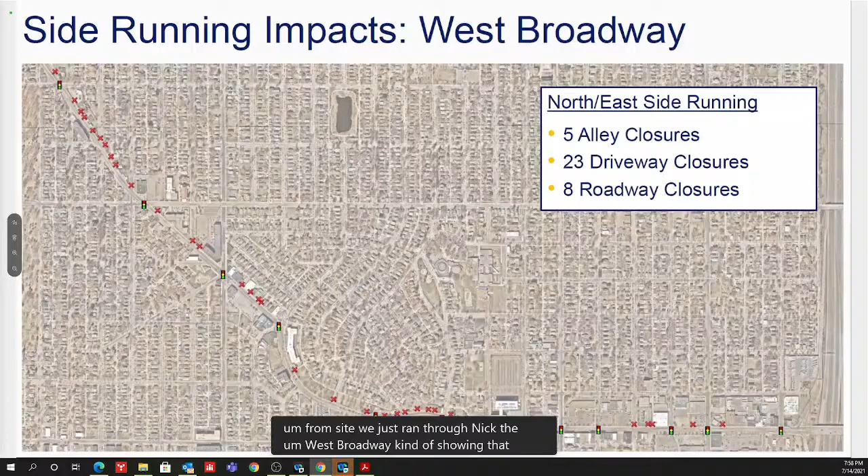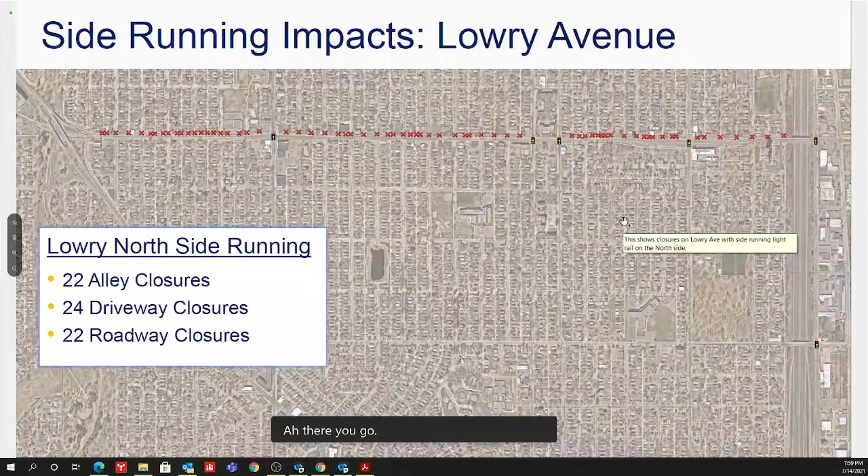How about a quick weird question, Nick? From what I've seen, everything is either straight or not straight - is there a mix of side running and then middle, or no?

Yes. As a matter of fact, Washington Avenue is one where we have a visualization for it - we didn't include it in this presentation, but as you get farther north with the Washington alignment, we're center running on Washington, but as we get farther north towards Lowry, we'll probably have to cross the tracks on a separate bridge or separately from being in the roadway, like Dan said before. It really wouldn't work going through the intersection there. So at that point, as we get north of a certain street, we would probably shift over to side running, closer to 94 in that green area, and then bring it over on a structure in that area. So yeah, we can combine them if the conditions are right.